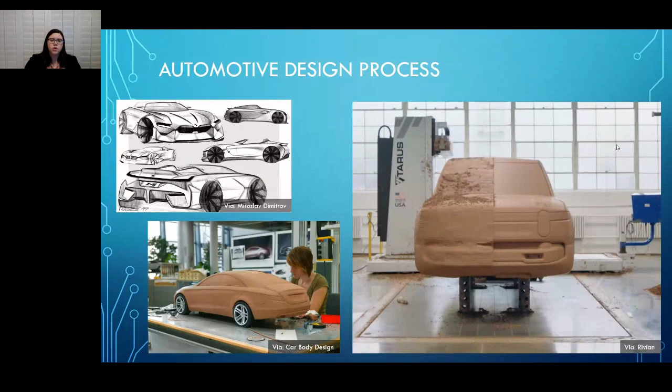A buck is constructed using a steel and plywood frame, and we glue foam onto that, which is milled to our data set, and then to an undercut of our data set. Then we apply the special automotive clay, which is milled to whatever surface data we're starting with. The clay modelers will come in and clean up all the mill marks, or even refine the design further if needed.

Then we'll apply a Scotchcal or a Di-Noc wrap, which is basically like a vinyl wrap that makes the clay look like it's painted. Once we install our 3D printed hard parts, it really is amazing how real these vehicles look from across the room. You would think you could open the door, get in, and drive it away. It's pretty amazing.

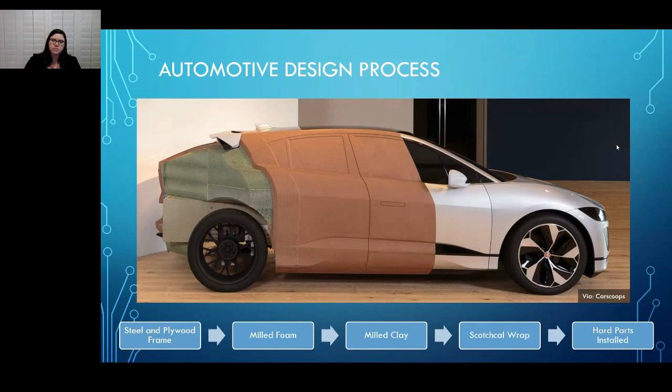The bottom lower part is printed and finished with a high gloss black paint to look like production materials. Then we'll do a 3D printed clear lens, which gets polished up, and the upper, which also gets wrapped in the same material as the body side. To give it that extra touch of realism, we'll actually take mirror stock and laser cut it to the correct contour and glue it to the opposite side of the mirror, so it actually is a mirror. From across the room, you wouldn't be able to tell that it's not a real vehicle.

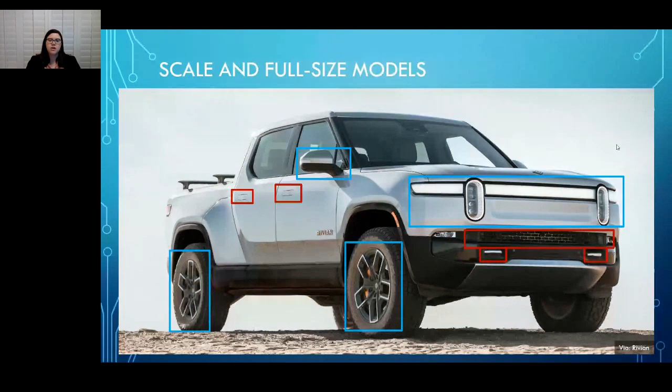So again, this one small piece is actually 8 different 3D printed components. It's something we utilize a lot.

In addition to that, we'll also print badging with the logo or the name, to give the extra sense of realism on the models.

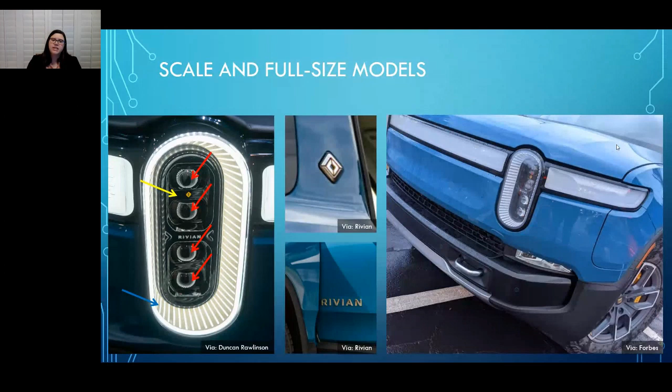Sometimes we can get production parts because they're in production and we have them at the factory, but it's not always something we can get our hands on in the studio. So it's really nice to have the option to pull the production data and print the parts out, and have them ready to install in the vehicle the next day. It gives us an advantage, and a lot of time it saves the day because of the quick turnarounds.

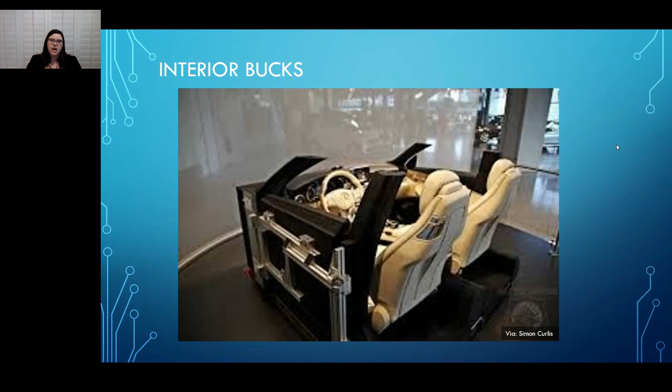For these types of interior bucks, we can produce them in different fidelity levels depending on what we need to evaluate. The highest level, or the last step of the process, would be a CMF buck, or a color, material, and finishes buck. This would be something designed to look like the final product.

The main door would be milled foam, and then we'd 3D print the lower section of the armrest in gray, which would be sent out to be wrapped in vegan leather. The bezel and door handle would be printed and then finished with that silver finish. And then we'll do the armrest upper, also wrapped in a different vegan leather, and the wooded bezel.

When we're doing something like this, it really looks like the production data, and what it does is allow us to be confident that we're on the correct design decision sooner in the process rather than later. In the design studio, time is always your most valuable commodity. So as soon as you can put yourself on a design path that you feel confident in, it's really a huge advantage.

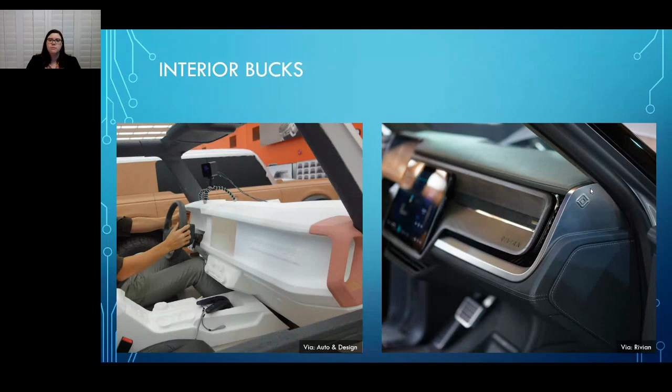And there's always parts that we know aren't going to change - like the screens, the vents, the cup holders might not be changing. So we'll actually mill in pockets to accept 3D printed hard parts. When it's time to evaluate that data, we'll install them into the clay, and everything can be looked at at once - the screens, the cup holders, and the vents. Then when it's time to make changes, we'll remove those parts, and it's a lot easier for our modelers to make big design changes on the surfaces without those parts being in the way. It's the best of both worlds, and it's just a process improvement that lets us better evaluate and work on these types of bucks.

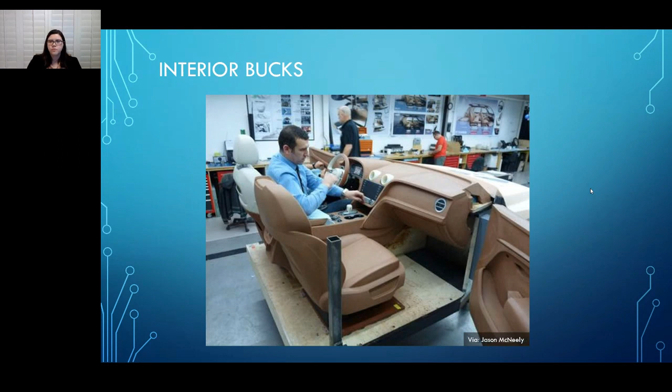Something we do a lot is models that are just going to be shown on a tabletop. They don't necessarily have a buck to go into, but it's something we want to look at anyway. This can be steering wheels, cup holders, or even portions of the IP geometry we might be looking at, or grab handles - anything you want to see or feel before you set yourself down on a design path.

We'll use additive to bring that to life before we make a final decision. If we're looking at a steering wheel, I can print 3 or 4 sections of different designs overnight. Within about 24 hours, the designers have those parts in their hands and can hold them and feel confident on a design path within one day, which is pretty amazing. It's something we do a lot, just as a gut check, but also to make sure that with every step of the process we're still on the correct path. That way we don't have to pivot later - because, you know, that's something we're willing to do, but if we don't need to, that's always better.

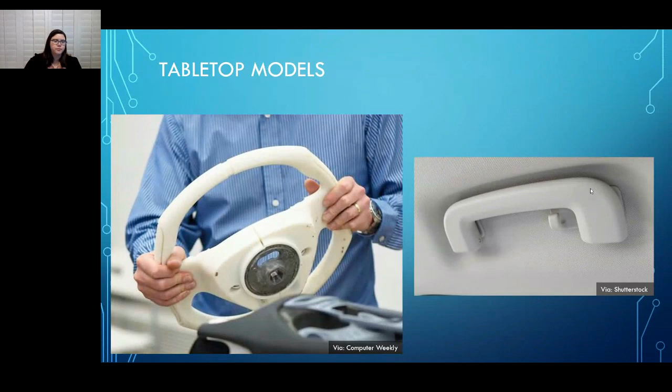Something I don't print parts for that often, but I think it's kind of a cool application, is parts for VR bucks. So just like we evaluate the interior and exterior of the vehicle in clay and real space, we'll do the same thing using VR environments or AR environments. So when we're evaluating the interior of the vehicle, we'll actually design a buck that's just like a driver's seat and a steering wheel and maybe some pedals, so that when you sit in the seat and you put on the VR goggles, you can reach out and you can touch a steering wheel and you can put your feet on the pedals.

It kind of just gives us an extra bit of realism for the VR environment. So every once in a while, I'll get a request to print a steering wheel or a pedal or something like that. Not too often. Usually those parts last a pretty long time and there's not a lot of changes, but it's just something coming from a space where I'm way more familiar with additive than I am the automotive environment. It sort of was like, oh, I didn't even think about that as an application for additive, but it's a pretty cool one. It's a lot of different technologies coming together, which I kind of like.

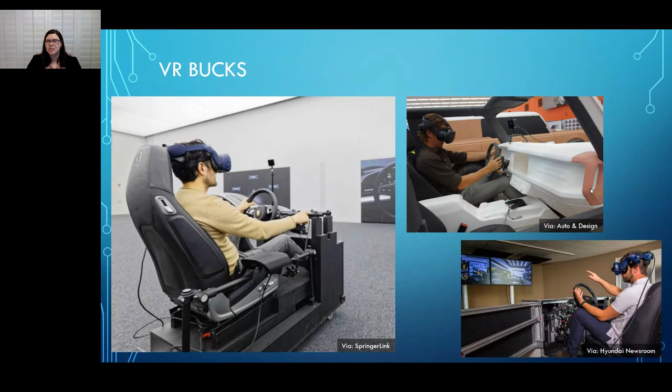And because of all the different finishes of these parts coming together, there was a lot of tweaking and adjusting the CAD and reprinting and getting them wrapped and finished, so that when we finished assembling them, they went together very easily and very cleanly, but also the fit and finish of this sort of example piece to show our trim levels matched the high level of finish that you'll see in the vehicles.

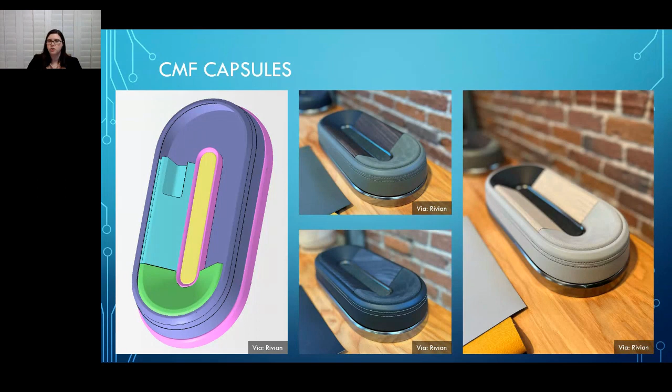So not only do we have something to look at in the studio that's more representative of the final product, but we also are able to use these to display to our customers our current trim levels. So here's a picture of these capsules on display at our Rivian space in Venice.

This is a community space for gatherings and workshops for the community, but it also is a space for Rivian to show the community what we do as a company, what we're about, and to see our products. So if you go there, you'll see these and you'll know that they're 3D printed. So you might even have a little bit more information than the people that work there. Who knows?

The design is actually 34 different printed parts. It kind of adds up fast when you have different components that all go together and different finishes as well. For me, when I get this set of data, I'm thinking about how the parts are being finished and what materials they need to be made out of.

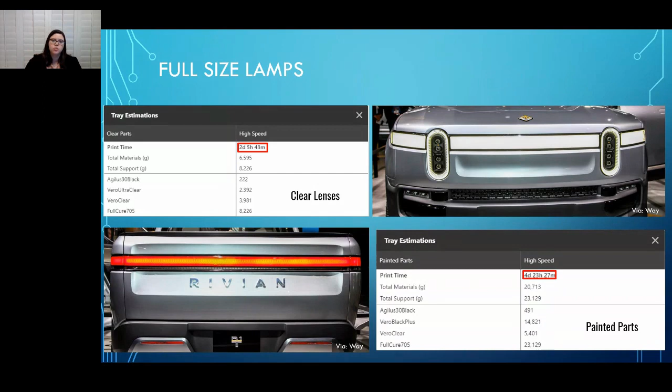The last application is for a steering wheel mock-up. This is something we'll design or produce when we want to modify a steering wheel using clay, having the designers work on it with the clay modeler. This would be produced traditionally using a steel frame packed with clay and then milled to a starting data set, and then the clay modeler and designer would work on it.

What I can actually do with additive is take that starting data set, offset it inwards about 10 mils, and print the frame out of an FDM or FFF machine in sparse, having it ready pretty much the next day to be packed with clay and milled. Again, the time savings between something that would take 2 or 3 days to produce traditionally versus 21 hours using additive is huge for us.

The time savings is what we're always looking to achieve. It is a little bit more expensive in cost, about $290 in material compared to $40, but we're always looking to save time. It's also lighter weight, which is easier for the designers to work with, and we can modify it more easily later because it's a plastic structure and not a steel frame, which is great for modifying it while preserving your carefully crafted clay model on the outside of the steering wheel.

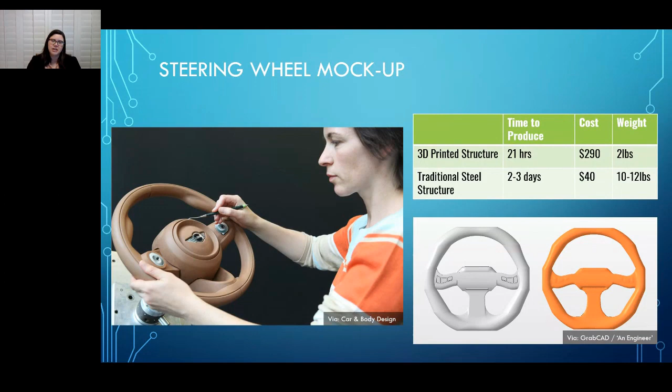Excellent, thank you Steph. That's Stephanie. That's awesome. It's actually really good from a point of view, because to see the application in the prototype process and how you're actually changing and adjusting and the differences that you're making.

Carol McDonald has asked, how do you print the very large parts? What type of printers do you use? That's a great question. So I have 2 PolyJet machines, a type of machine that Stratasys produces, and we actually have their Objet1000. If you're familiar with PolyJet machines, it's massive. The build envelope on that machine is 1,000 millimeters across, 800 millimeters to the front, and 500 millimeters in the Z. So that is huge for 3D printing.

It really allows us to print all of those light bar parts in one piece without cutting, which is very critical for the lenses because we definitely don't want to bond them and see a line. We also have an FDM machine, and that build area is 2 feet by 3 feet by 2 feet, which is really great when we need to produce big stuff and we don't want to have to fuss with bonding it together.